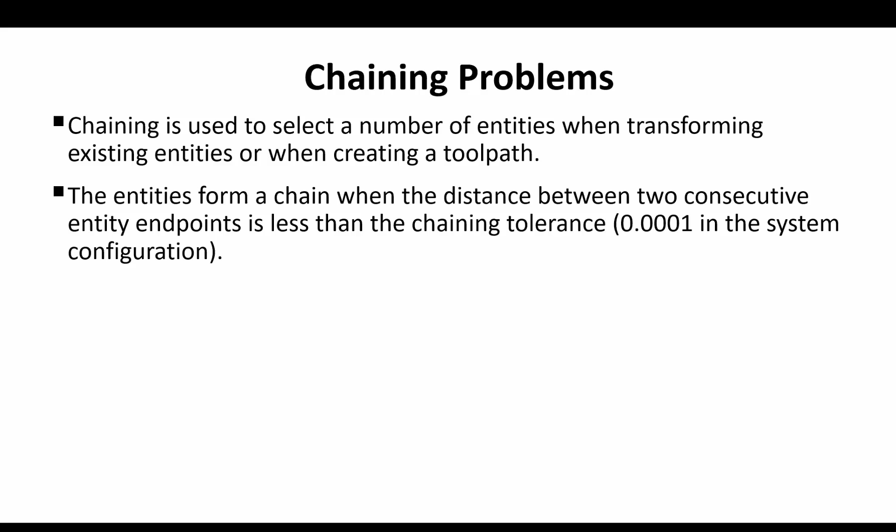Chaining does several things. It selects and sequences the geometry used to control the machining path, sets the machining direction, and if the chain is closed, it sets the start point for the toolpath. Most of the 2D toolpaths involve moving a tool around a profile of entities called a chain. A chain can consist of wireframe geometry or the edges and faces of solid bodies.

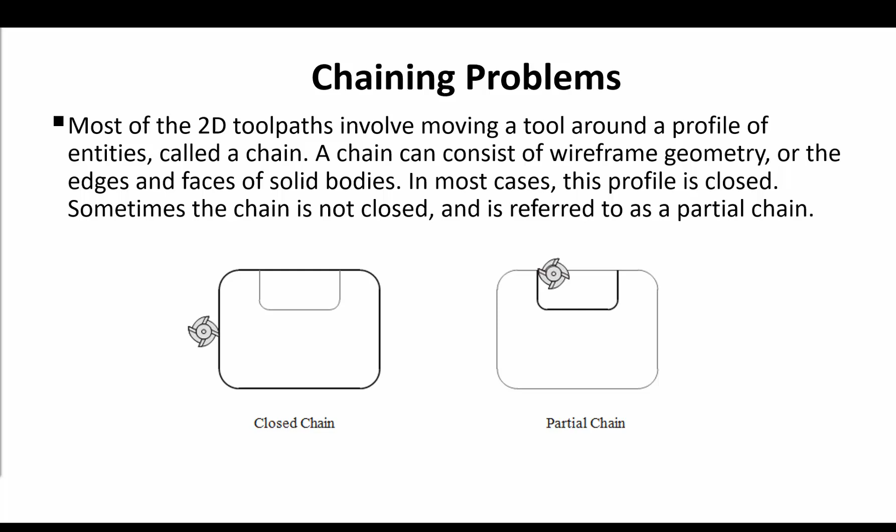In most cases, this profile is closed, but sometimes the chain is not closed and is referred to as a partial chain. The most common chaining errors are caused by the following problems: small breaks or untrimmed entities, entities that do not lie in the same plane, duplicate entities, overlapping entities.

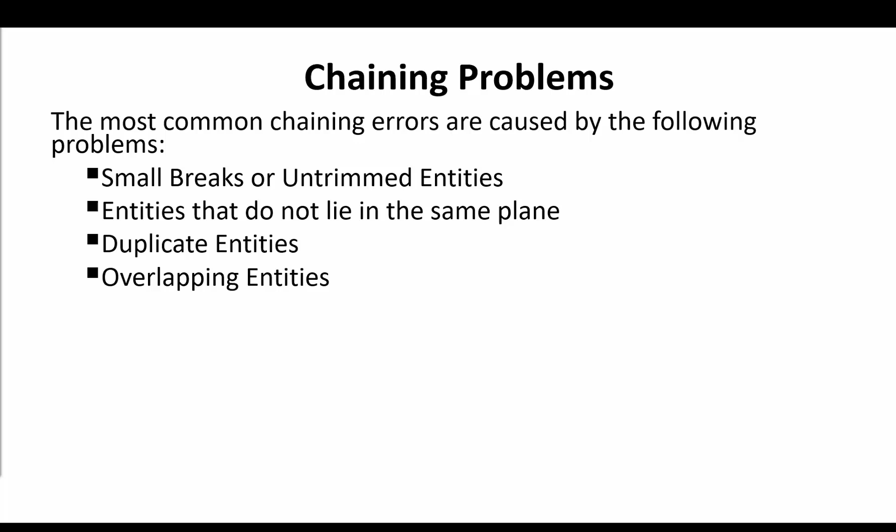It is not uncommon for wireframe drawings to contain errors that cause chaining problems. For example, two lines have been drawn where only one is needed. Very small gaps between entities may not even be visible at zoom extents. Good drawing practices, including the use of the auto cursor and trim functions, will avoid most problems. But even the most careful person makes mistakes. Therefore, it is a good practice to check the integrity of wireframe chains before starting to create toolpaths.

Small breaks or untrimmed entities that are extended over the intersection point can be avoided by using the auto cursor to ensure the entities connect. One way to find small breaks or untrimmed entities is using Display Endpoints from the Home tab. This function temporarily places a point at the end of each entity. Small gaps are often obvious as they appear as points that are noticeably brighter than others.

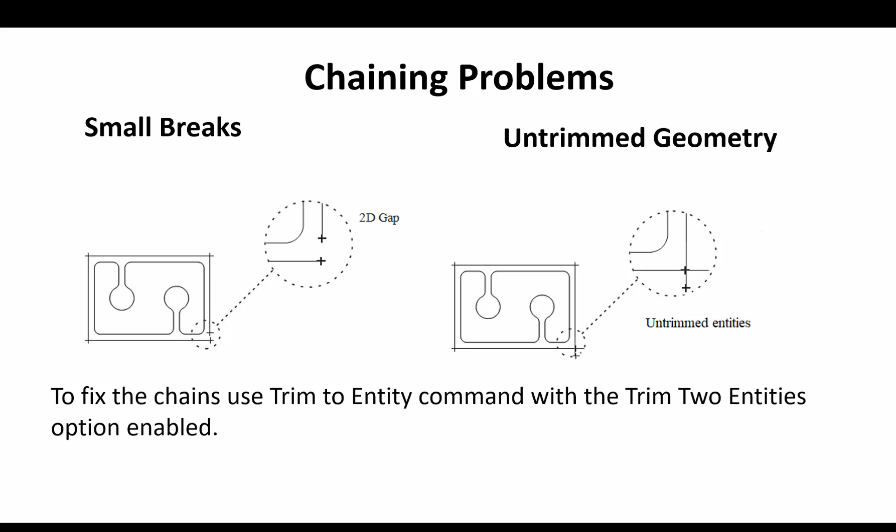Zooming in on these areas may reveal 2 points close together, one at the end of each entity, as you could see in the screenshots. The best way to fix these gaps or untrimmed entities is to trim the two entities using the Trim to Entities command.

Another type of break occurs when entities in the chain do not lie at the same depth. When viewed from the top, the chains appear to be continuous. Changing to an isometric view reveals one entity at a different Z value than the others. To fix the chain, you will have to use the Transform Project command.

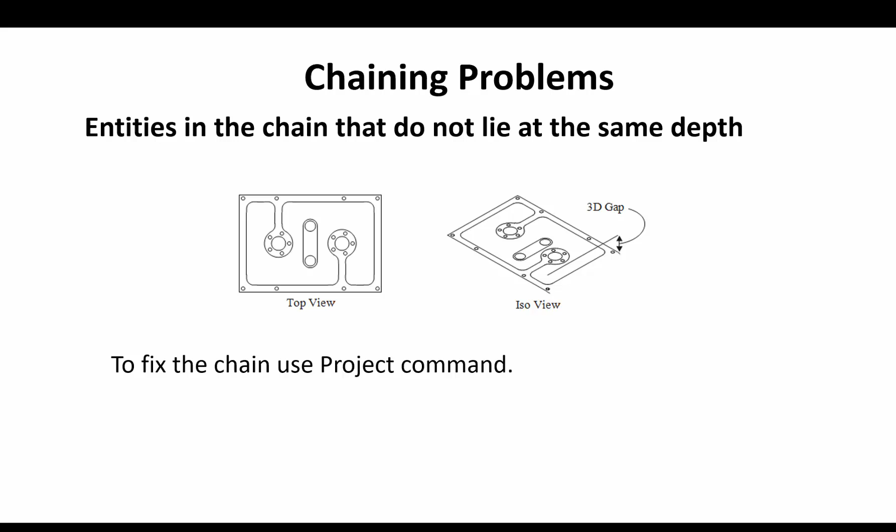Duplicate entities are identical entities that are created in the same plane and share the same endpoints, or for arcs, the same center and radius. You can configure Mastercam to automatically find and delete duplicate entities every time you open a file and provide an online summary of the types and number of duplicate entities that were deleted. This setting is on the File page of the System Configuration dialog box.

Note that this option does not fix duplicate entities that you create in the geometry in the current session of Mastercam. To fix the chain, you should use the Delete Duplicates command.

Overlapping entities share only one endpoint with another entity and can be very difficult to detect. Consider, for example, the profile shown. It consists of 4 lines connecting points P1, P2, P3, and P4, and an extra line between the points P3 and P5. This line shares an endpoint with line 2 at P3. The other end of this line is not shared with any other entity.

When Mastercam tries to chain this profile, chaining stops at P3. Mastercam reports the message "Branch point reached. Select next branch." Mastercam does not know if you want to follow the path along line 3 or along the extra line. The first indication that something is wrong is that chaining does not start and end where you expect it.

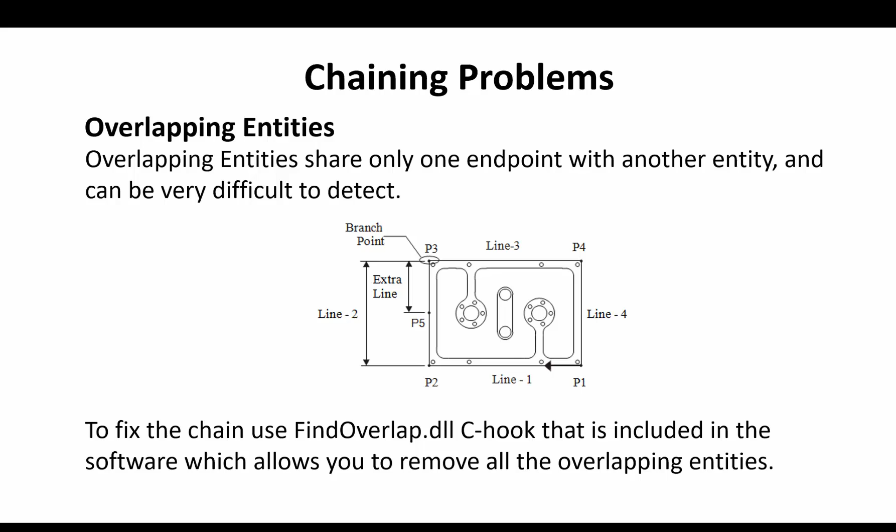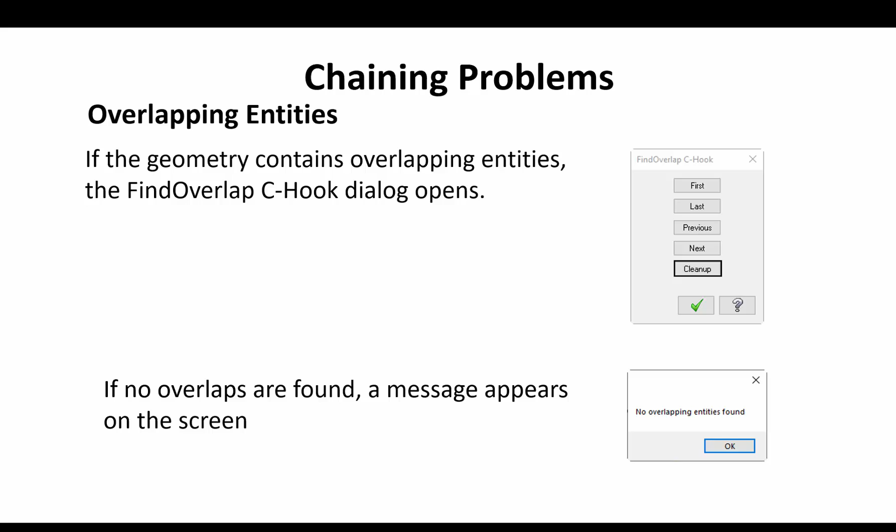To open the C-hook directory, you can press Alt-C, or you can select the Run Add-in command from the Home tab. Find and open the Find Overlap DLL in the directory, and then make a window and include all the entities that you want to check. If the geometry contains overlapping entities, the Find Overlap C-hook dialog opens, and you just need to click on the Cleanup button. If no overlaps are found, a message appears on the screen stating that.

Next, I'm going to demonstrate how you can fix the chaining problems in Mastercam. The AnalyzeChain file is already opened. And the first thing that I'm going to check is where I have problems on each of these chains.

The easiest way to check for problems in the chaining is to hold down the Shift key and select the chain. I will select all of the 4 chains, and you can see where the chaining stops for each of them. I know that at those points I have problems that need to be fixed.

Without researching further, I'm just going to unselect all of them by clicking on the Clear Selection button. And I'm going to go into the Home tab and just select Delete Duplicates. It gives me a report that 2 lines were found to be duplicates, and the system automatically deletes them.

I will again check the chains holding down the Shift key. I will just repeat the same selection. You can see this chain is already fixed. Something was also fixed here. It was showing with magenta color, and one entity was deleted at that point. But we have other problems in that chain that need to be fixed.

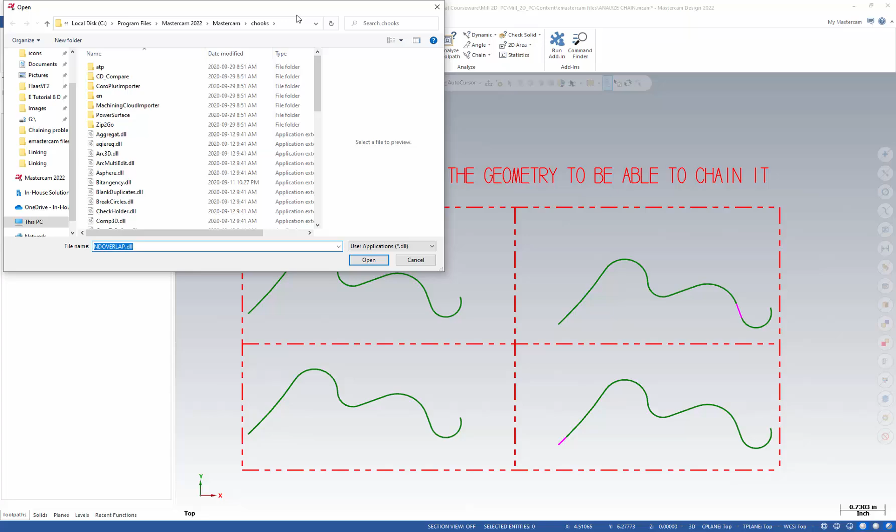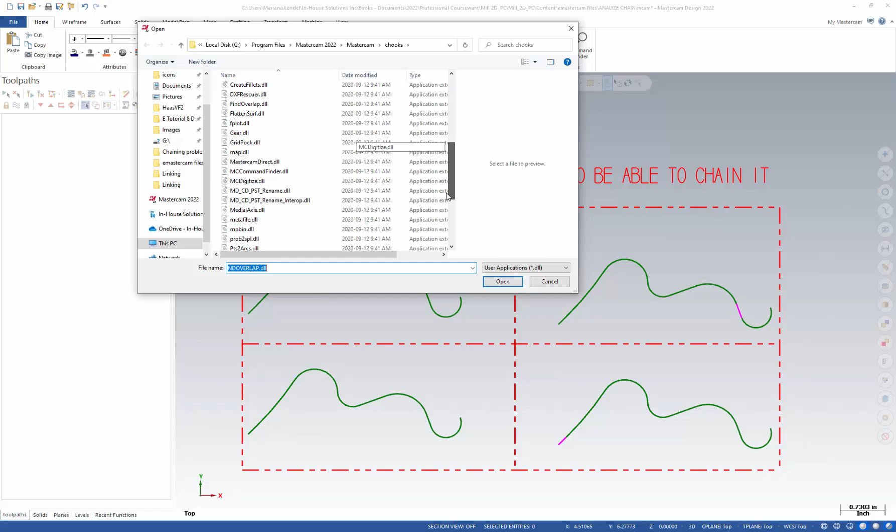This opens a directory with other C-hooks that are available in Mastercam. These are short programs done by a third party or by CNC Software, and they are concentrated on doing a special function. Eventually, they could end up in the software if they get very popular. I am going to select FindOverlap.dll and just open it.

The system prompts you to select the entities to check for overlap. I'm just going to make a big window around the geometry and then end the selection. And you can see the Find Overlap C-hook dialog box appears, which tells you that there are some issues. It also highlights the first overlapping entity. If you want to check, you can just go next.

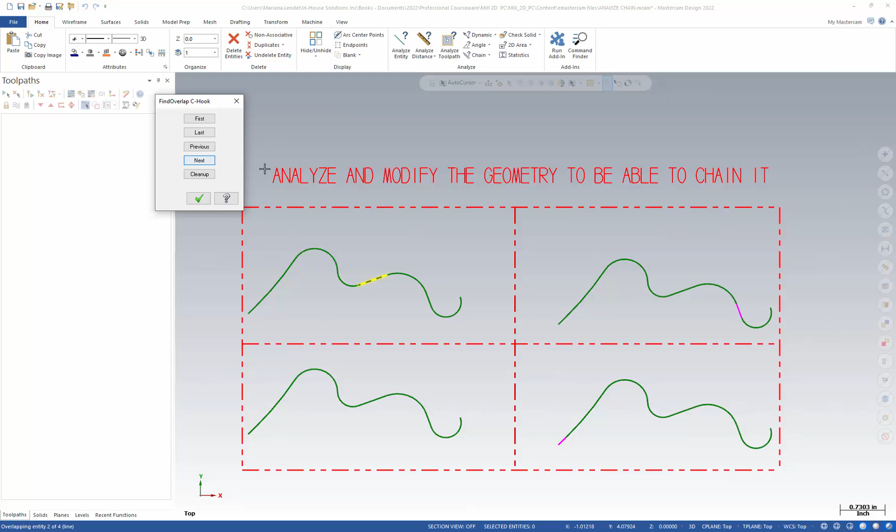So you can see there was a smaller line that starts at the same endpoint with this line. I am not going to bother to go through the chain. I'm just going to click on Cleanup, and the system reports that 2 overlapping entities were deleted. I will accept that.

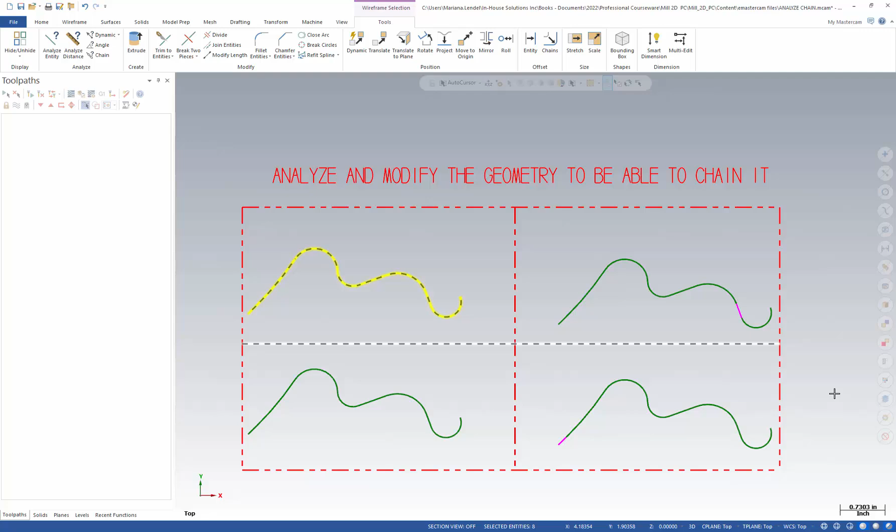And holding down the Shift key, I will just reselect this chain. And now you can see the problems are fixed for this chain. Again, I will unselect them. Currently, I have two chains that are fixed. Let's check this chain. I'm going to do a right mouse click and select the isometric view.

Can you see how from the top the geometry looked okay, but the arc and the line are not created in the same plane as the rest of the geometry? I made this quite obvious, but the distance between the endpoints, remember, could be just slightly bigger than the 1/10. It could be 2/10, and the chaining will still not work.

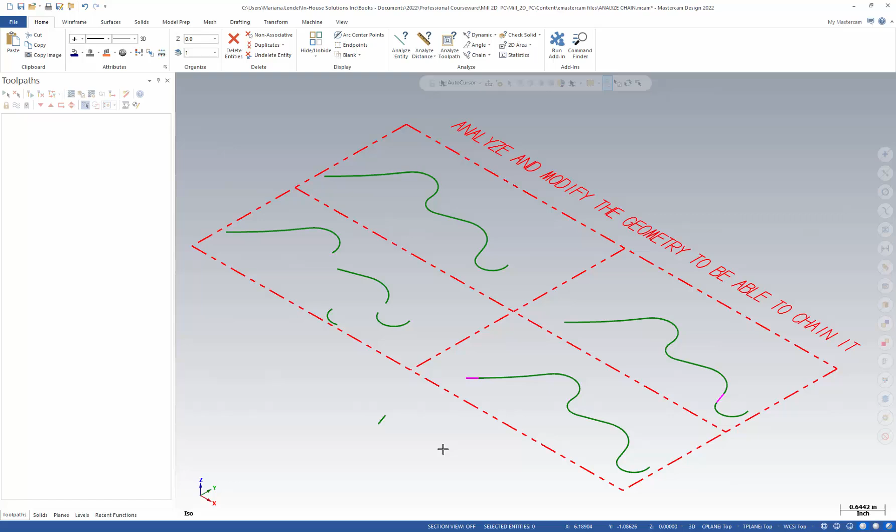So once you fixed duplicate entities and overlapping entities, if you see that you still have a problem in the geometry, you can use the Transform and Project command to ensure that the entities are all lying at the same depth. I'm going to select the command, and I'm going to make a window around this chain, holding down the Control key to ensure that I'm not grabbing anything else, and click on the opposite corner to select the chain and end selection.

Pay attention not to leave Copy on, because that will create duplicate entities. You want to move entities. And we project all of them at Z0, so the depth is set up to 0 in the current construction plane that was already selected and is the Top construction plane.

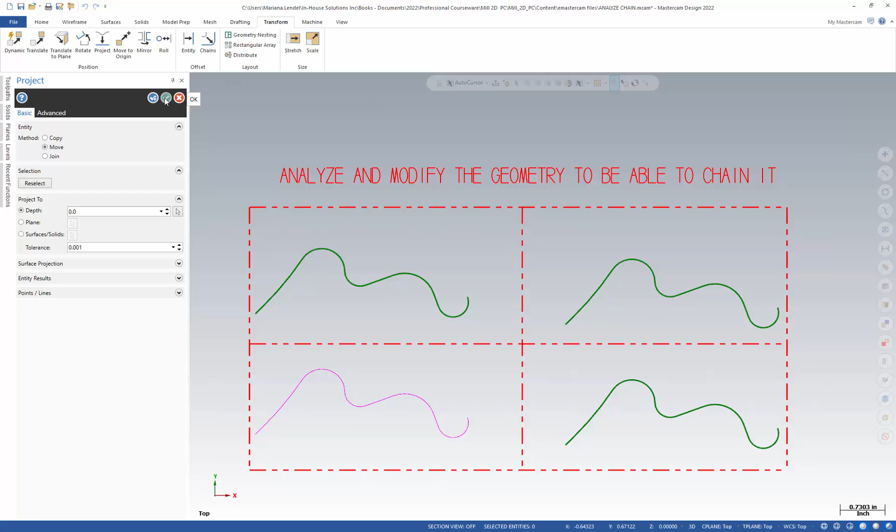Now I can just select the OK button to exit, and holding down the Shift key, I can check this chain. Everything looks okay. Unselect the chain and maybe get rid of the result color by doing a right mouse click and selecting Clear Colors from the mini toolbar.

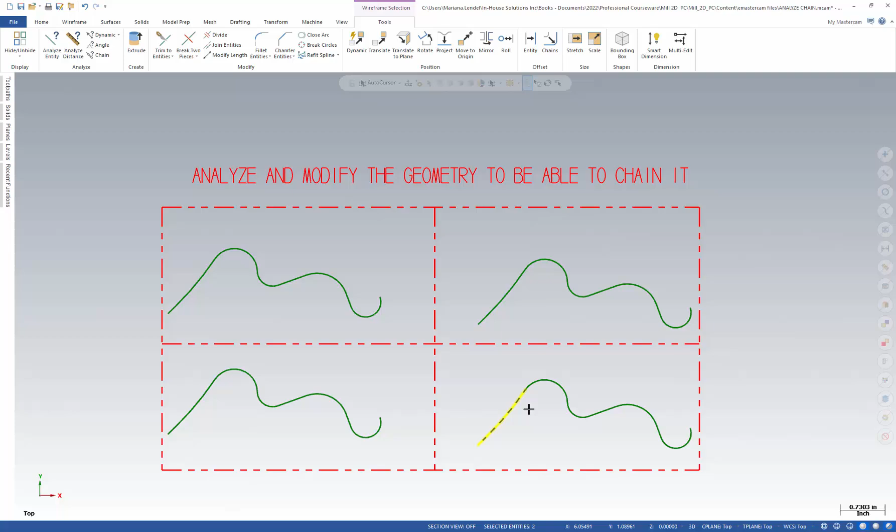The last chain has the trimming problems. So holding down the Shift key, I select that segment of the chain. If we zoom in a lot, it might still be difficult to see, but you can see one entity is not trimmed to the arc. This line is actually untrimmed. And the way you can fix this is using Trim to Entities, which I can find in the Tools tab, but you can also find it in Wireframe and Trim to Entities.

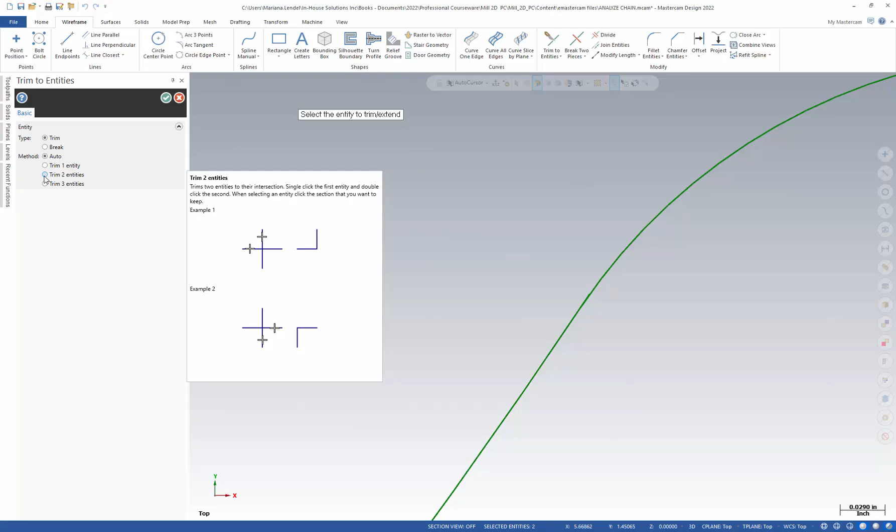Ensure here that the Trim 2 entities method is selected, and then pick one entity. You can see it's slightly bigger here. You can see it's not stopping at the intersection. So you select the first entity where the chain stopped, but included, and then the next entity that the chaining did not select.

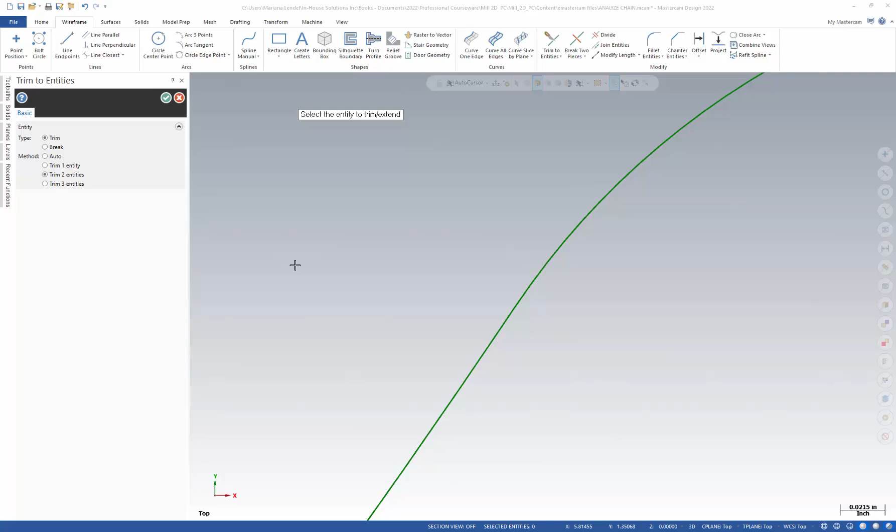I'm just going to do a right mouse click and select Fit to fit the geometry. I'm going to exit the Trim to Entities command. And then holding down the Shift key, I will reselect the chain. You can see the problem is now between the arc and the line.

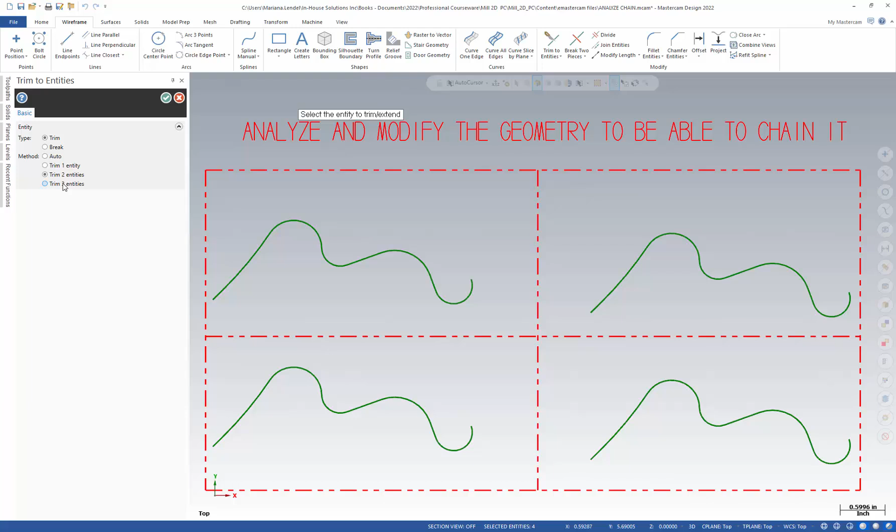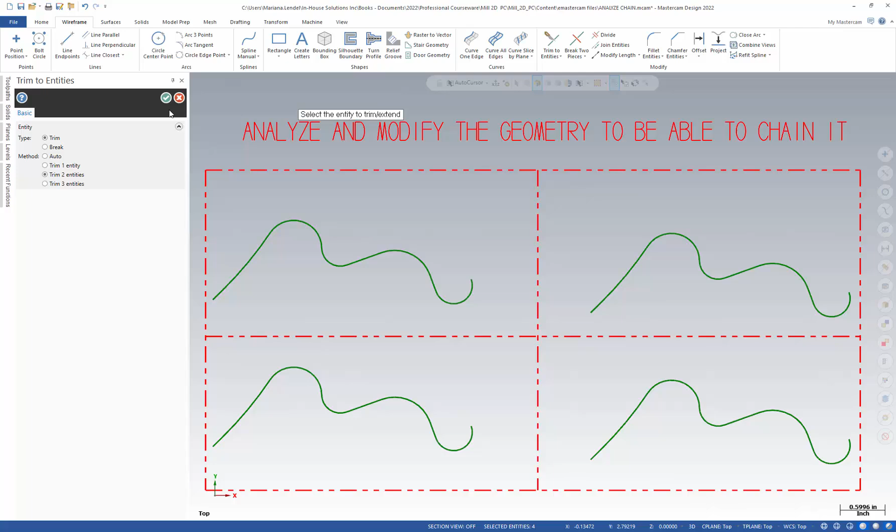Again, we can zoom in, or we can just select Trim to Entities and make sure that the Trim 2 entities method is on. And I will select the arc that was selected with the chaining, and then the line that the chain option did not select, and exit Trim to Entities.

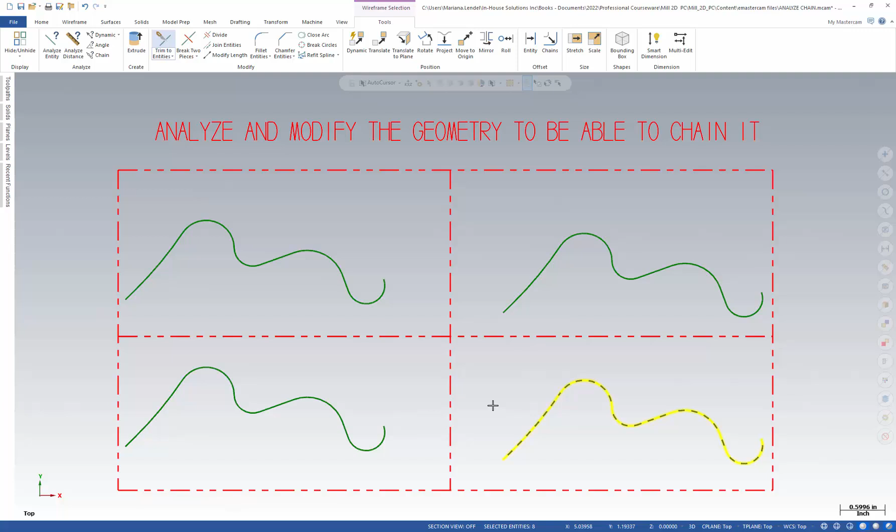And again, holding down the Shift key, I'm selecting the chain. As you can see, right now it's fixed. And if I hold down the Shift key, I can select all the other three chains. They are all fixed, as you can see. And this concludes the video on chaining problems and how they can be fixed.